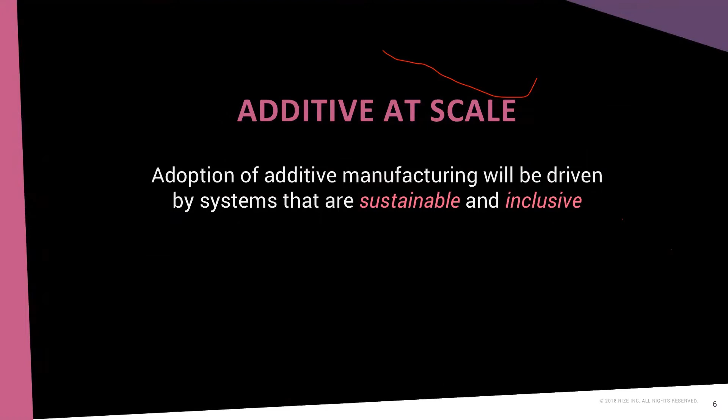But first, what does additive at scale mean? When we talk about scaling, we're talking about wider adoption by enabling new use cases for additive manufacturing. So progressive companies are already providing it for design engineers, making functional prototypes for iterative design. And as material properties have improved, additive is taking root with manufacturing support, making custom end-use parts.

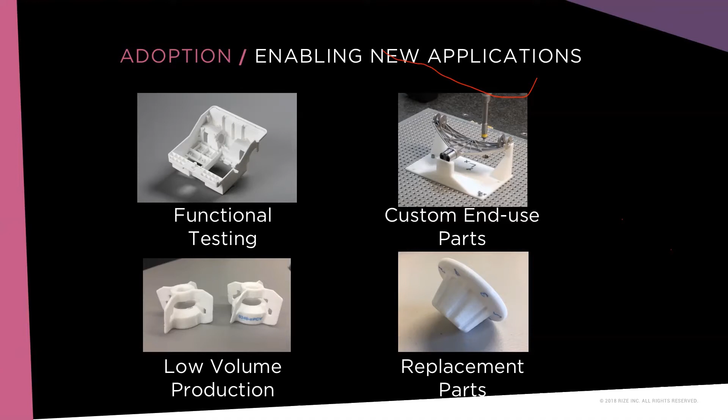More recently, companies are starting to make parts that actually go into the product, where the benefits of additive tip the scales away from traditional manufacturing techniques, such as in situations with lower volumes or unique geometries. And ultimately, a lot of companies want to see additive used for replacement parts, to reduce the money tied up in spares inventory and to increase the speed at which a broken machine can be brought online again. So these are some of the ways additive manufacturing can be leveraged across a business.

The common theme in these diverse use cases is the notion of pushing the process closer to the point of consumption. So, of course, additive is in the lab, where a lot of companies use it now, but it also belongs in the office next to the design engineer. It belongs in the factory next to the manufacturing engineer and next to the production line. And it belongs in the field next to the end user.

Andy, what you were saying reminded me of a story from one of our customers. They needed a really strong handheld tool for their assembly process, and they were machining them out of aluminum. They were very strong, but they tended to get lost or dropped, and they were expensive being machined out of aluminum. So they were able to print that same tool on the Rize machine for a fraction of the cost, and have a handheld tool their assembly folks could use over and over again. The end cost on the tool wound up being like $4. As they iterated the tool, they could give everybody a new tool for 12 or 15 bucks a pop. It's a really good example of taking additive right to the factory floor.

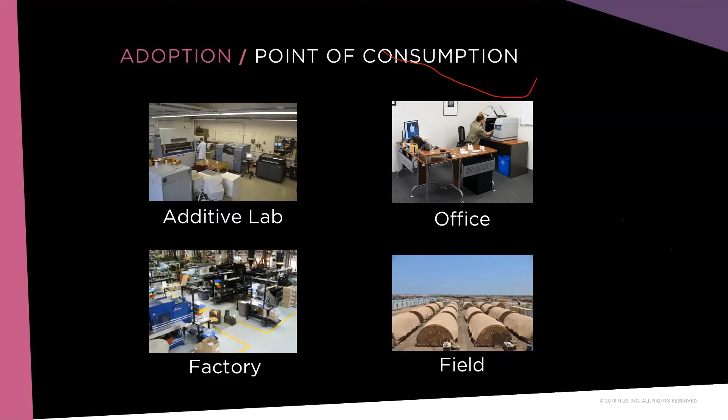Yeah, that's a great example, a great end use case. So before I talk about sustainability and inclusiveness, I want to introduce our technology, because it'll help to talk about those principles in the context of a real world solution.

Rize has patented a process we call augmented polymer deposition. This is a hybrid technology, polymer deposition plus piezo printing under the same cover. Polymer deposition is an FDM process, extruding a thermoplastic layer by layer to build a part. Piezo printing is jetting fluids onto the polymer to change the properties of the polymer on a voxel level.

This gives us two really unique advantages. Number one is near zero post-processing. We use one of the piezo print head channels to jet a release agent between support structures and part. So when the part is finished building, you can simply peel off the supports from the part by hand without tools, and you end up with a great surface finish. It takes very little time and doesn't require any additional equipment. That's what we call near zero post-processing.

The other great advantage is labeling. We use another channel in the piezo print head to jet a marking ink onto the polymer, and this adds a whole new dimension of functionality to parts. You can put part numbers, serial numbers, tracing information, usage information. I'll go into this a little bit deeper later, but labeling is a great advantage.

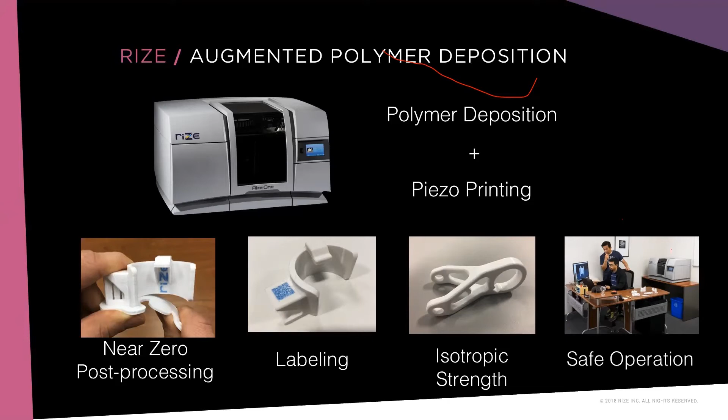The other feature we wanted to focus on was safety. When we developed our polymer, we came up with something we make with medical grade components that don't leach or contaminate anything they come into contact with, and they don't emit VOCs during the print process.

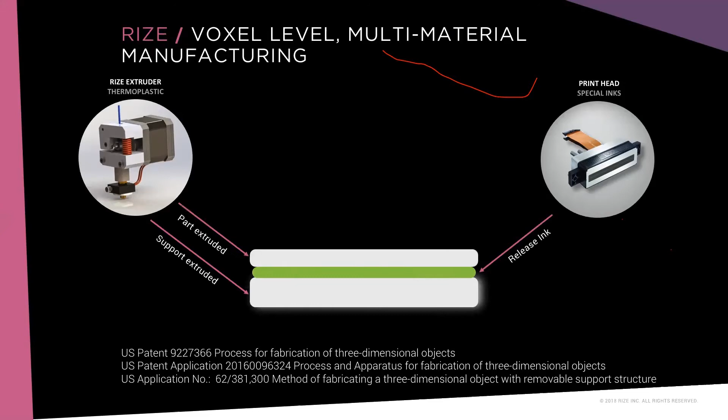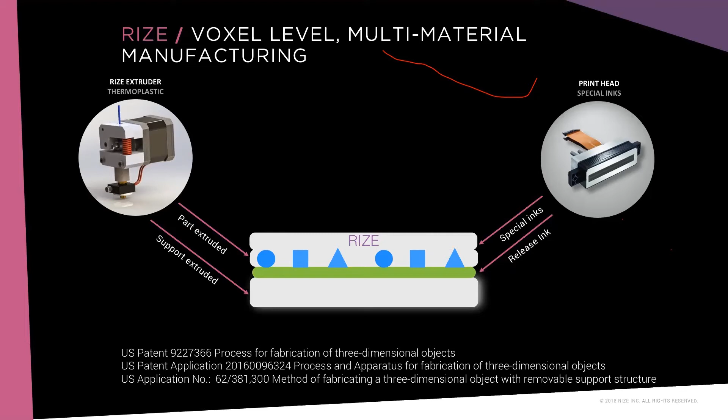Here's a more graphical representation of how it works. On the left, you see an extruder, which extrudes the thermoplastic, and on the right, the print head, which jets different fluids. First, the extruder extrudes a layer of support material. Then the inkjet jets a release agent on top of the support. Then we extrude part on top of the release agent, and this is what enables the easily removed supports. Then we can jet different inks into the part to change the properties of the polymer, and we've done that to add marking ink, labeling, and graphics.

When we built this machine, we made something that's industrial class. Industrial meaning it's durable, highly automated, has a locking cover, heated chamber, hot swappable filament, build plate detection, network and USB connectivity, a touch screen for simple operation, and of course, UL and CE certification.

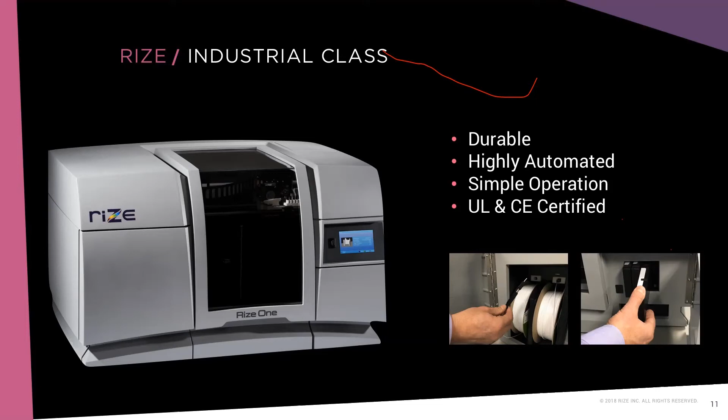So we also built the machine to be office compatible. It fits on a desk, small enough to be moved easily by a couple people, and it's quiet operation so it doesn't disturb you. All you have to do is plug it in. There's no additional facility requirements, which is key. There's no extra equipment. You don't need hoods or vents or plumbing or waste management. It just sits on the desk, and what you see is all you need.

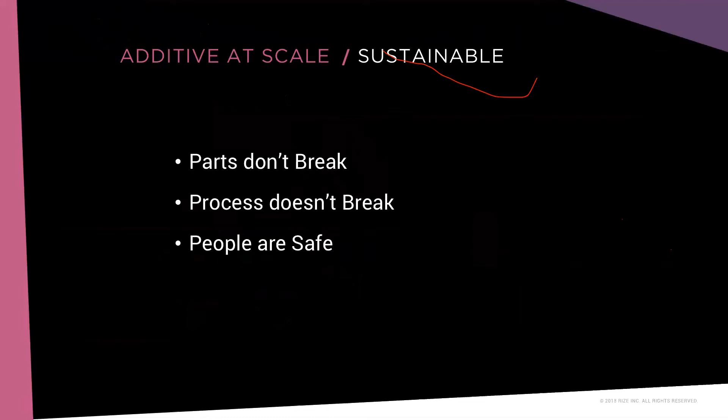All right, so that was a quick intro to the technology. Now I want to return to these notions of sustainability and inclusiveness. So what does sustainable mean? Parts don't break, process doesn't break, and people are safe. I'll describe those in a little more detail.

So parts don't break. We already talked about the advantages of isotropic strength and how valuable that is. Low moisture absorption means the properties of the part won't change over time, they'll remain consistent. Chemical resistance to alcohols, ketones, and acids means the part can be used in applications where it may come into contact with these common substances. And high heat deflection temperature means you can use the part in high heat environments without it deforming. These are the properties that make these parts really durable.

And Andy, that impeller on the top there reminded me of another customer we were working with. Just on the strength of these parts, we were able to print a part that needed to be tested at 3,500 RPM, and that's pretty fast. It was a challenge for sure for some different materials, but we were able to do that very successfully with Rize parts. At 3,500 RPM was no problem at all. So they are exceptionally strong.

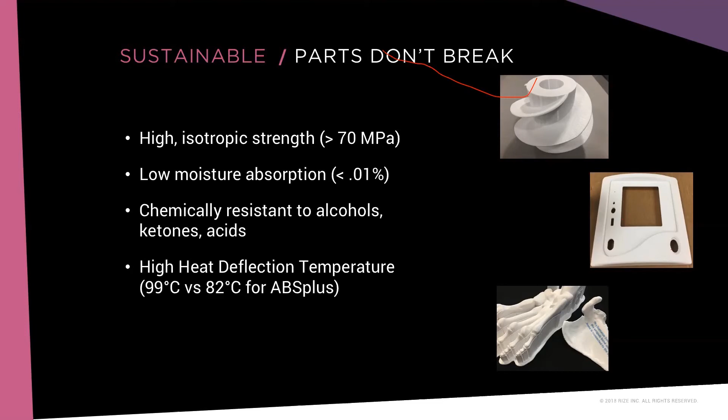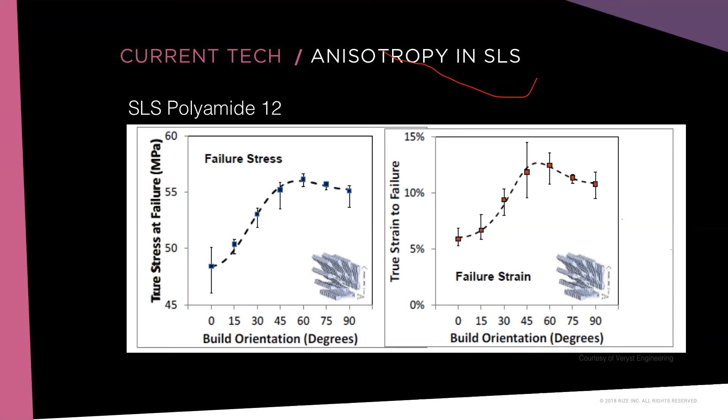Yep, they're very durable. So I want to talk about that strength a little bit more too, and compare it to some other additive manufacturing technologies. Here's a graph showing the strength of an SLS part versus the orientation in the build. The key takeaway here is, depending on the part orientation, the strength could be as much as 20% different. So this is not an isotropic technology.

Here's another comparison. This is another high performance polymer versus ours. The blue graph represents ABS plus, the red graph represents our polymer. On the left, you see the molded strength - those bars represent sort of the as good as it could get strength of the polymer. The middle graph represents the strength along the axis of extrusion - you can see ABS plus still holds up pretty well. But the key thing here is the graph on the right. This represents the layer-to-layer bond, the Z strength, and ABS plus is only 60% of the strength in the ZX axis versus the other axis, whereas our polymer is almost identical - and this is what we mean by isotropic.

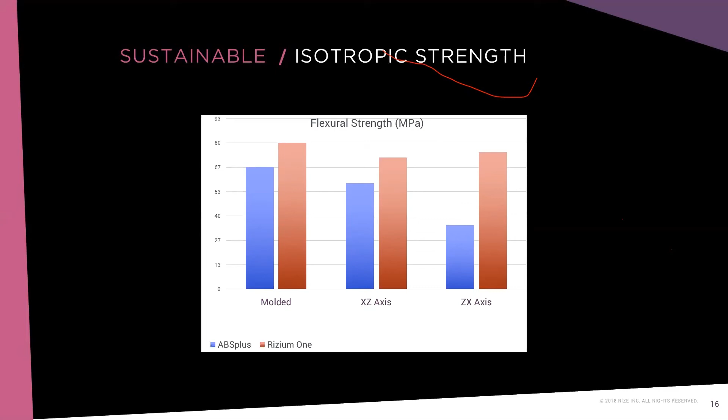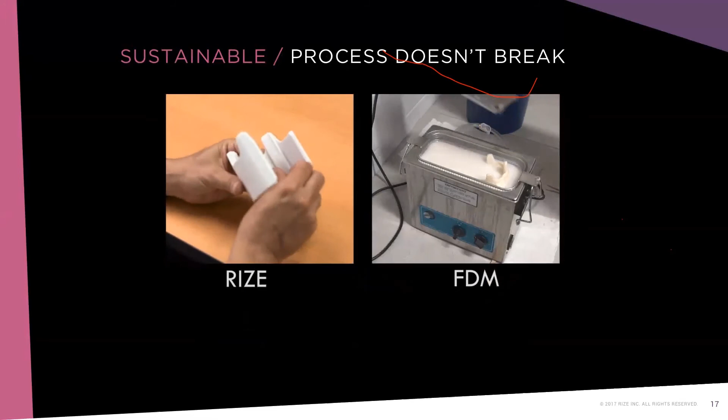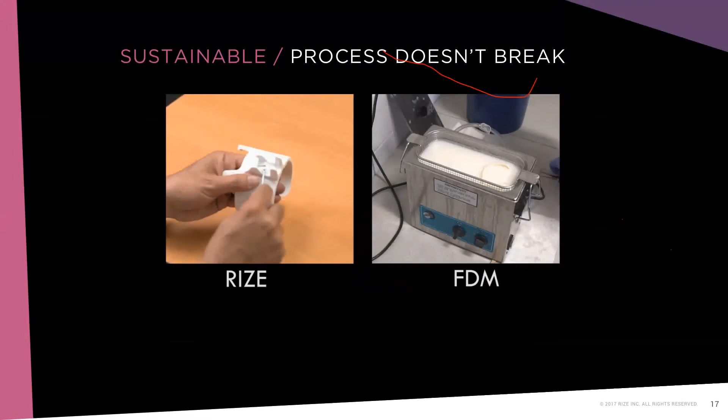So that's durable parts. Another element of sustainability is the process - the process doesn't break. This means additive manufacturing shouldn't add friction to your already existing workflow. On the left, you see someone taking the supports off a Rize part quickly by hand. On the right, you see someone using soluble supports. Notice that it adds a lot of time to the process - there's a tank, cleaning fluid, an operator wearing safety gear who has been trained to use this equipment. So it adds time, it adds additional equipment. You need a lab environment, and you need a trained operator. So this is what adds friction to your process.

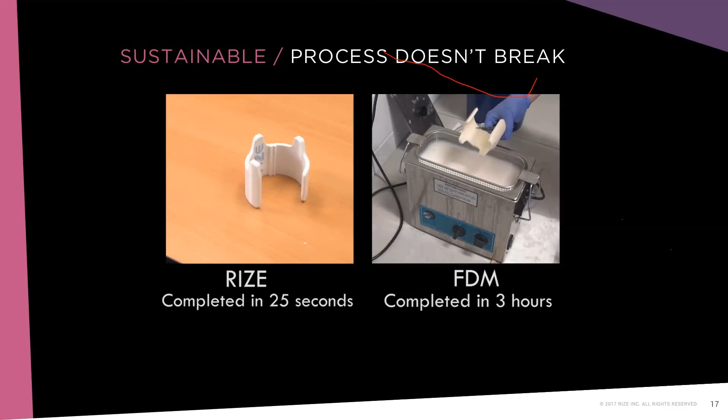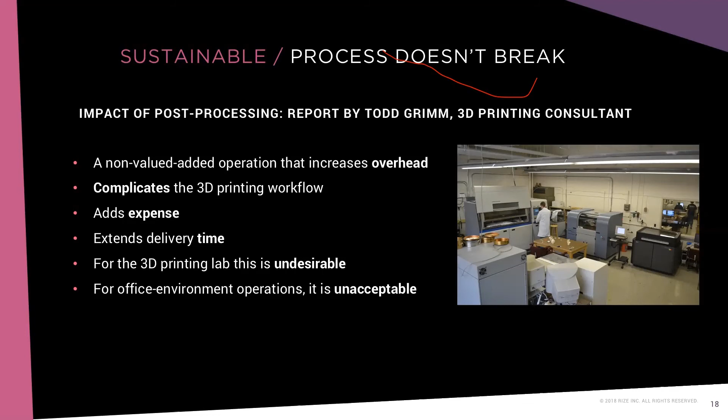So we talked about durable parts. We talked about reducing friction in the process. Now let's talk about why safety is important to sustainability.

For additive manufacturing to be sustainable, you need a system that's not harmful to the user, so it can be used by anyone. Here's a study by IIT showing some typical FDM thermoplastics, which emit VOCs. Wherever you have FDM machines extruding typical thermoplastics, you have VOCs, volatile organic compounds, which means you need venting. And if you've ever set up a print farm, you know what I mean.

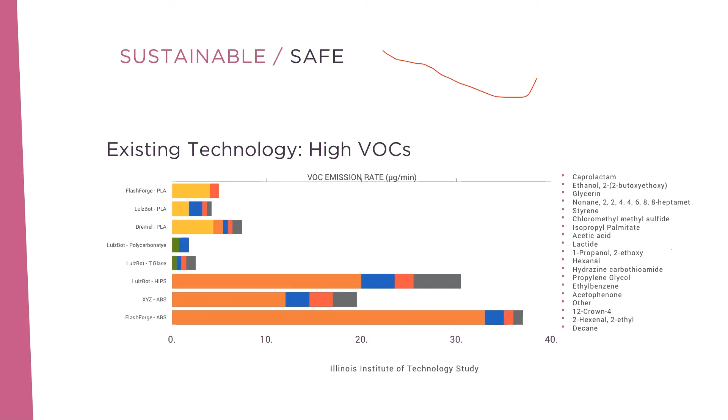The Rize thermoplastic is not on this list because it emits 0 VOCs.

Here's another existing technology, water-soluble supports. It sounds clean, but it requires high alkaline cleaning agents, a heated tank, a trained operator wearing safety gear, and careful disposal of the used solutions. So this supposedly safe technology requires extra equipment, gear, a lab setting, and waste management. And these are the drawbacks of the technology that prevent it from being used by just anybody.

Andy, that just reminded me, I think it was a week ago, yesterday or today, I was on a customer site, and they had - we're replacing a fleet of FDM machines - and they had this massive setup there for dealing with the waste. Huge wash tanks, and then because they couldn't complete the plumbing where they were at, they actually had to take everything in and out with fork trucks to do the solvents and all that stuff. It was an incredibly complex and expensive process, as opposed to just snap and taking those supports off. It makes a big difference for a lot of customers.

Yeah, that's right. I mean, it adds - you need lab space, you need waste management, and you need trained people to do this stuff. So it does add a lot of friction to the process.

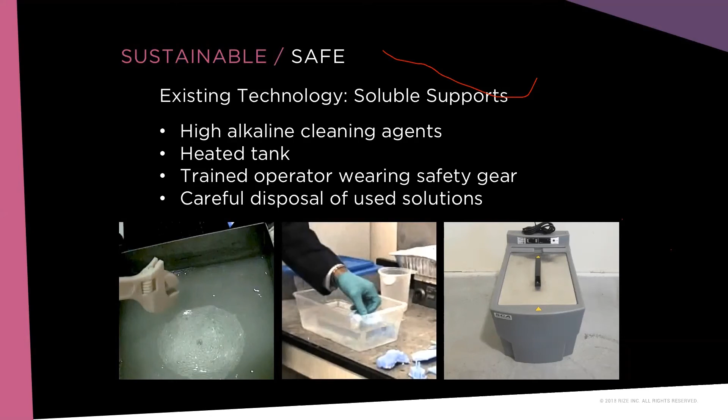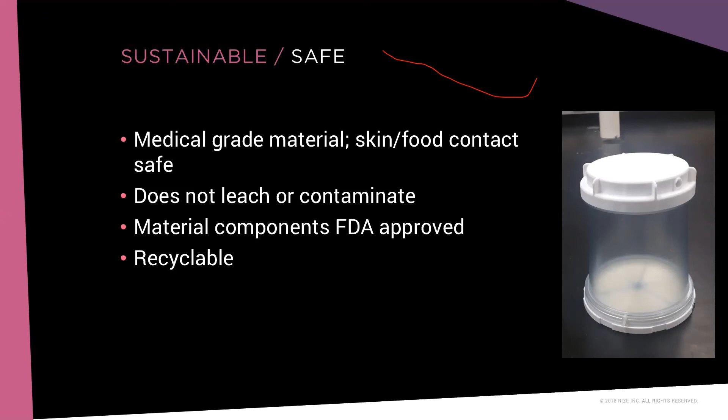So to return to our material for a moment, our Rize polymer is made with medical grade components that are skin and food contact safe. They don't leach or contaminate whatever they come into contact with. The components are FDA approved, it's recyclable, they don't emit VOCs, and they don't require chemical post-processing. These are the elements of safety that Rize brings to the table.

So that was sustainability: durable parts, frictionless process, safety. Now, inclusiveness is very direct. Parts are suitable for more applications, and the process is accessible to more people.

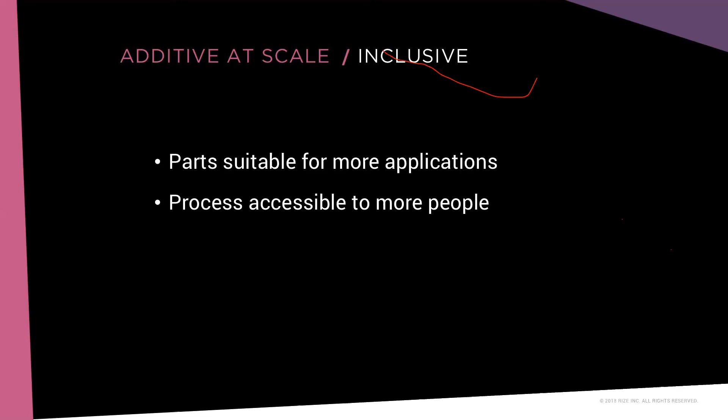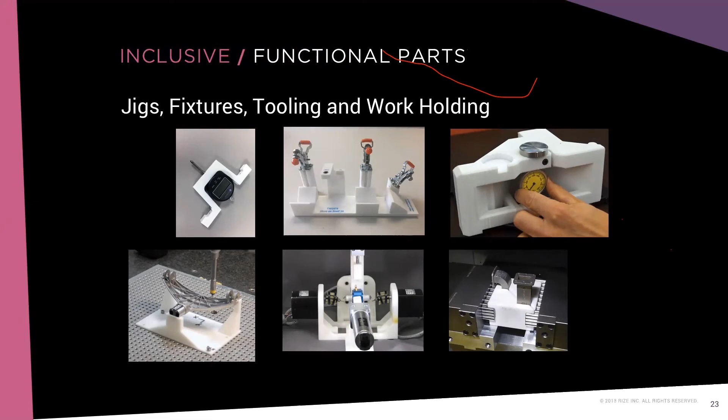Parts suitable for more applications - what I mean by that is functional parts must be strong, durable, and accurate, which means they can be used for jigs, fixtures, tooling, and work holding, as illustrated in these sample parts.

Parts can be used for casting. Our polymer has a very low surface tension, which makes it ideal for certain casting applications, such as making silicone molds, such as in this customer part.

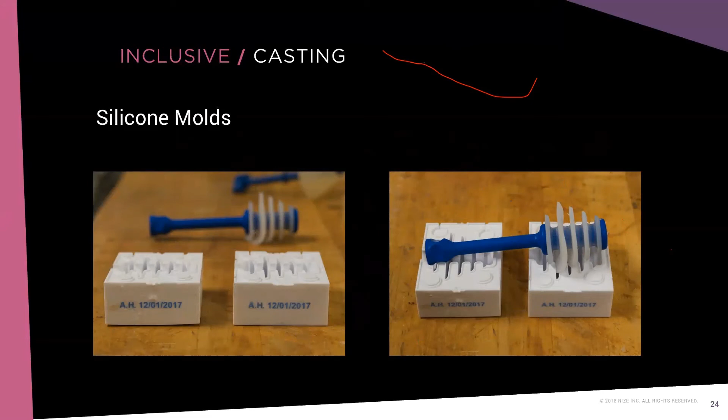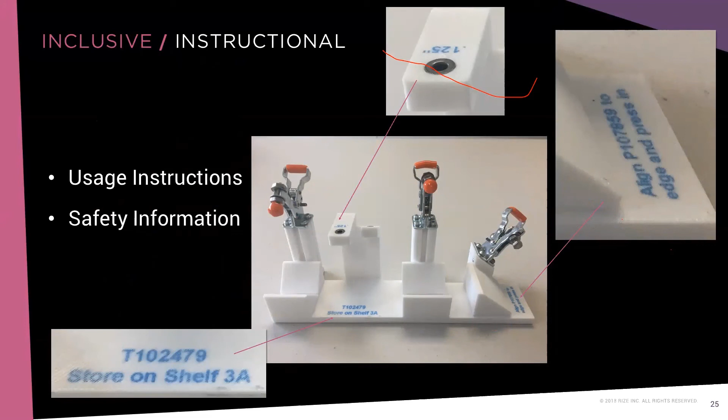And labeling adds a whole new dimension of functionality to the parts. So you can add usage instructions, such as shown on this fixture, safety information. You can add identification and tracing information, such as part numbers, revision numbers, serial numbers of every part that's printed, date and timestamps of when the part was created or even when the part was printed, the lot number of material that printed the part, the serial number of the machine that it was printed on.

Labeling provides total traceability. And I would add too, Andy, that it's also completely unique to our industry. Yeah.

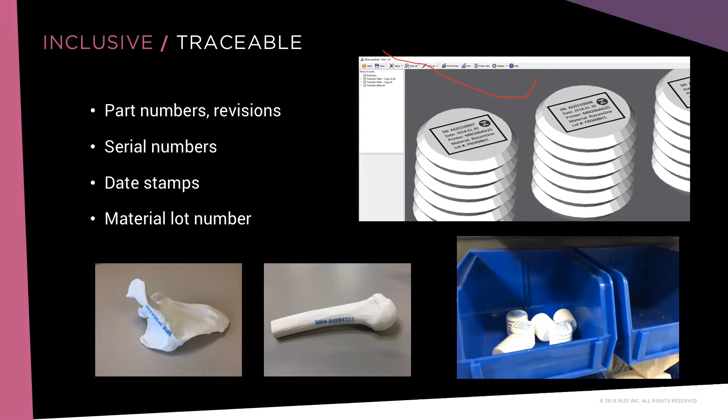So that was inclusiveness, meaning the parts are for a wide variety of applications. And now about the process being accessible to everyone.

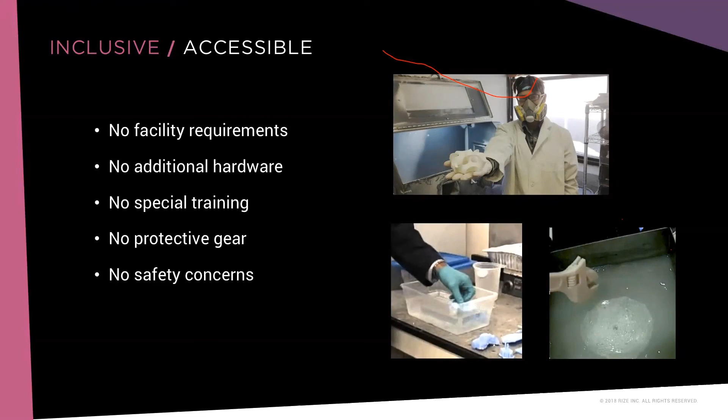A system that doesn't have additional facility requirements, doesn't require additional hardware for post-processing, doesn't require specially trained operators, doesn't require protective gear, and there's no safety concerns. These are the elements of a system that can be deployed anywhere and used by anyone.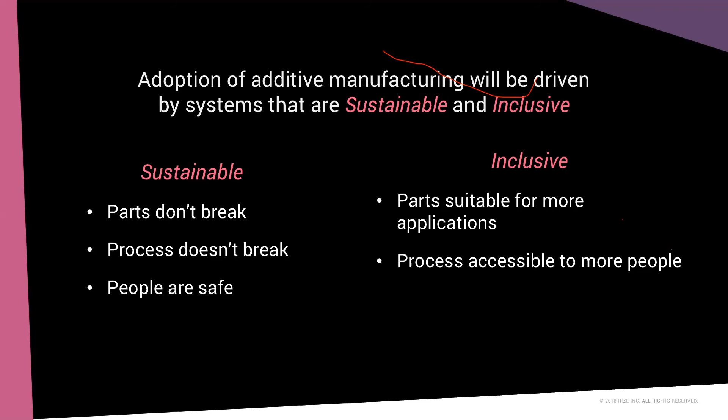So to summarize, our key belief is that the adoption of additive manufacturing will be driven by systems that are sustainable and inclusive. Sustainable means durable parts, frictionless process, and safe for people. Inclusive means parts that are suitable for more applications and a process that can be deployed anywhere, accessible to more people. So that wraps up my talk. I want to thank everybody for listening, and I'm going to hand it back to you, Jeremy.

Awesome. Thank you, Andy. I appreciate it very, very much. Some great insights, and it's always neat to talk to guys like you and hear from guys like you that have been in the business and in the industry and been a part of this from the very, very beginning.